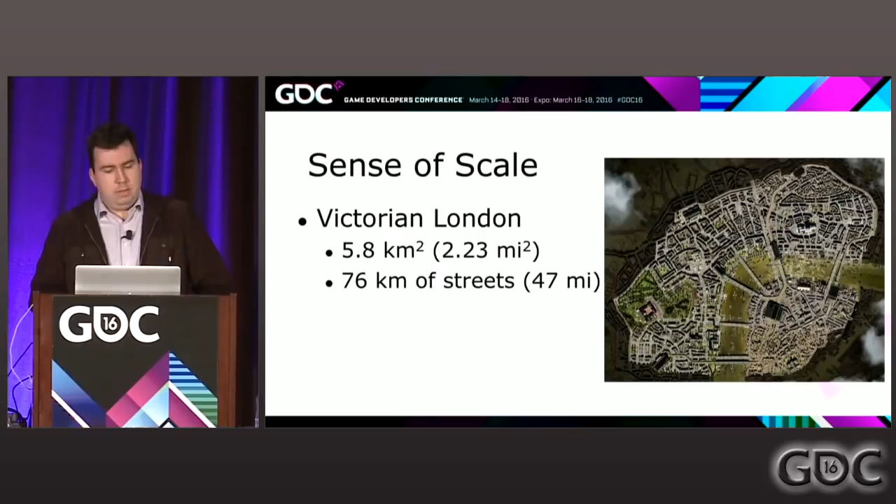So first of all, I will give you a general idea of the city we built and the kind of game we did for AC Syndicate. So it's set in Victorian London. We built a city of almost 6 square kilometers with almost 80 kilometers of drivable streets, a little bit more than 800 intersections, and we placed around 8,000 buildings. I'm speaking about generic buildings because it excludes the landmarks, train stations, factories, and kind of big buildings.

The sound is kind of weird, but you get the idea of the features. So in addition to the video, I'm going to talk about the user interface, how the user interface evolved throughout the project. For each subject, I'm going to introduce the context, explain what we did, and some information about the post-mortem and feedback we got on these features.

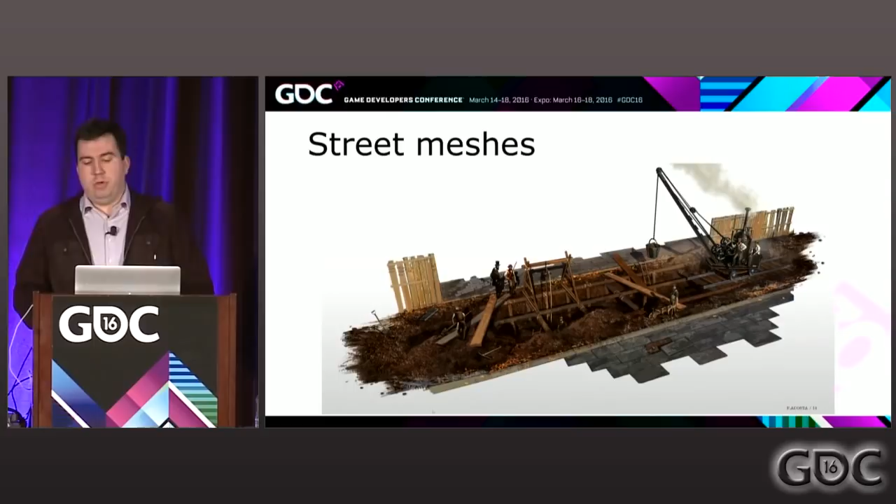We started by using a debug display to prototype all the features we wanted. Let me show you a quick video of the prototyping phase, without audio this time. At the beginning, you're going to see the creation of an intersection and our attempt to fit the AC Unity solution on the road network.

Not good. Okay. Oops, sorry. I'm trying to fix it. Okay, it should work now.

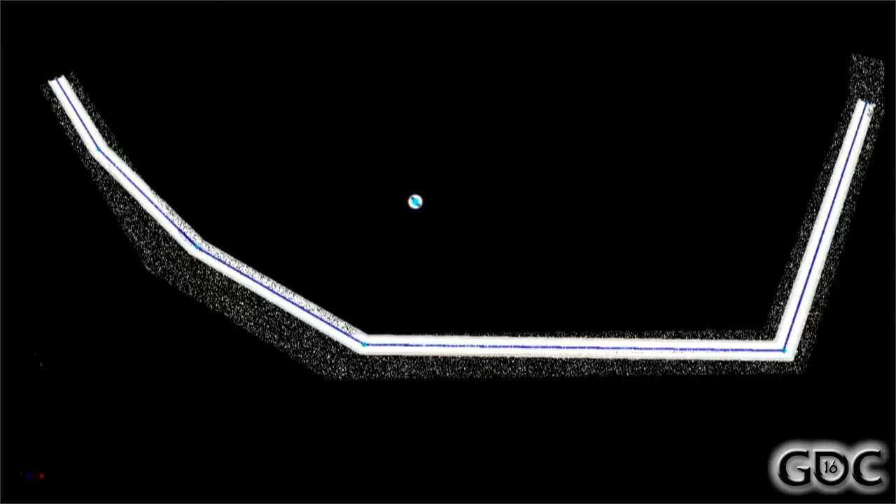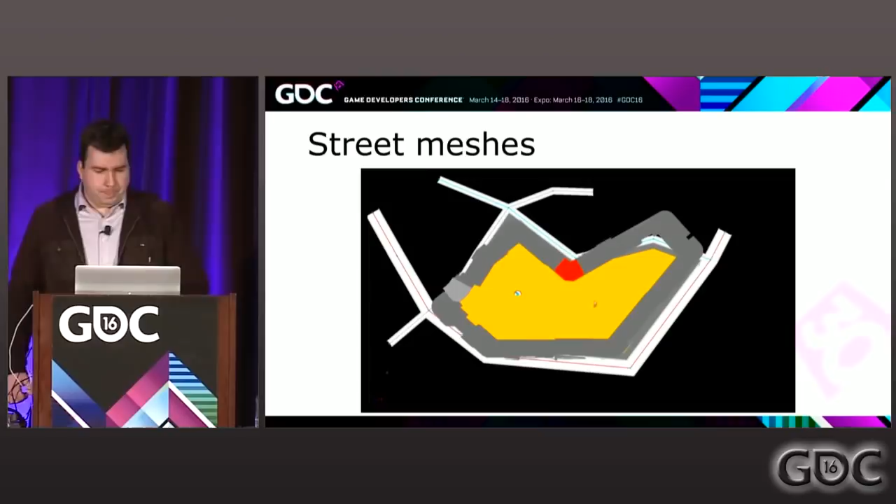Okay, so that's the debug display. Intersection, so remember it's only in debug display, so that's the network, that's the buildings. In the last frame of the video, we tried to fit the AC Unity Paris house blocks on the new street we just created. I highlighted the house blocks in blue.

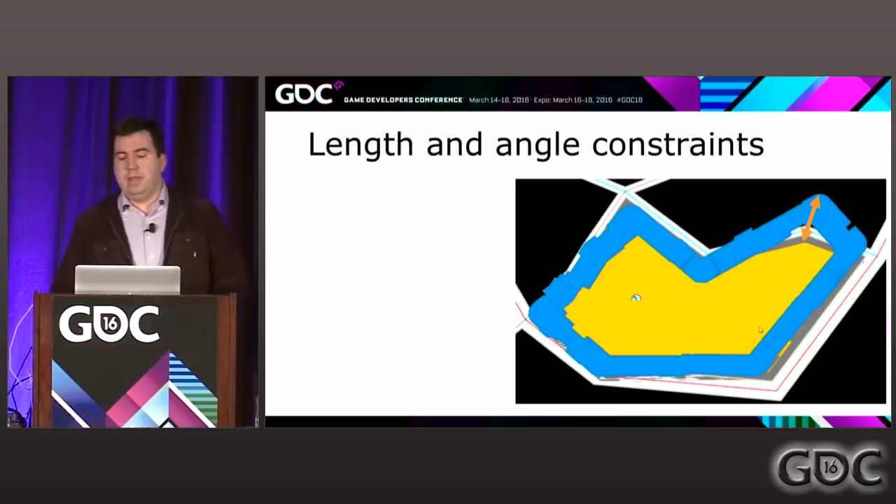And as you can see, the orange arrow shows a pretty wide offset between the building location and the edge of the street. This is due to the strong angle enforcement of the AC Unity technology. We could enforce the street to be at certain angles, but we realized pretty quickly that if we proceeded that way, any change in the city layout would alter much more than was intended. We would have a domino effect that would spread to the far reaches of the map. As you can imagine, this constraint was pretty drastic, and we needed to get rid of it. I will show you later how we managed to address this, but keep it in the back of your mind.

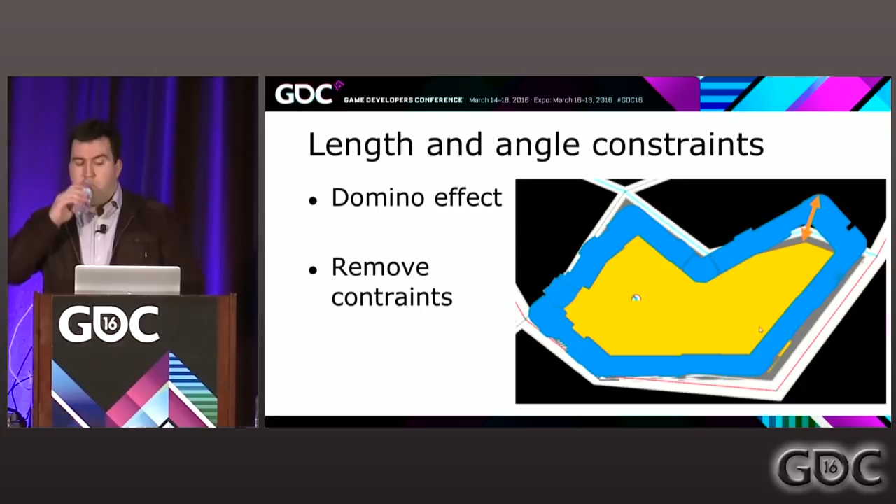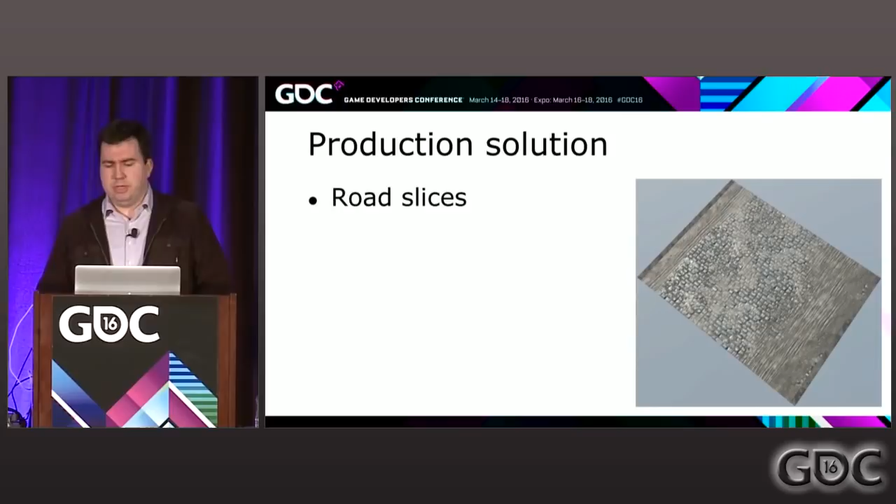The solution we settled for the road mesh generation is based on slices, small chunks of road of different sizes, carefully polished by artists. To generate the street of any length, we calculate the best combination of slices to approximate the length and stretch all the slices a little bit to achieve the desired length. During this process, we also handle slopes if one end of the street is higher than the other.

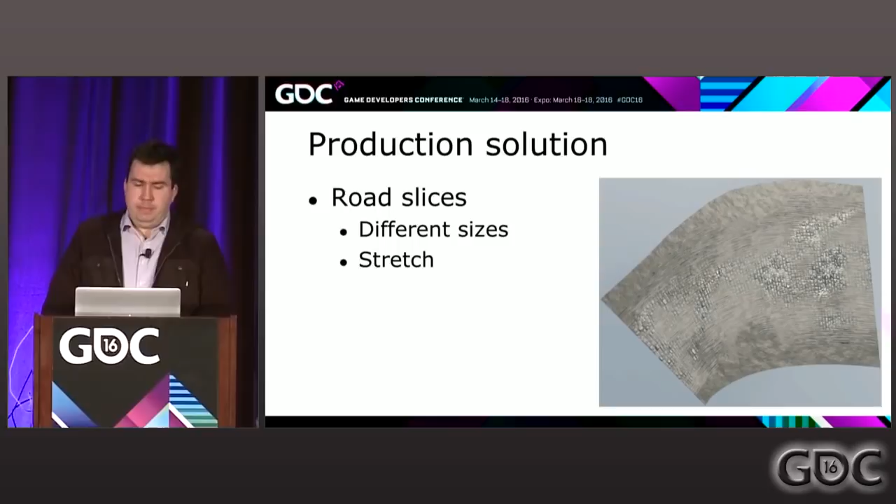For the intersection, we created unique slices for each type of intersection. To reduce the number of intersections, we were able to move the extremity of the street from plus or minus 15 degrees. So if we take a top view of the street, a very schematic one, it's a T-shaped intersection, and we could move the end of the street in the red cone. And it will be the same for all other street entries.

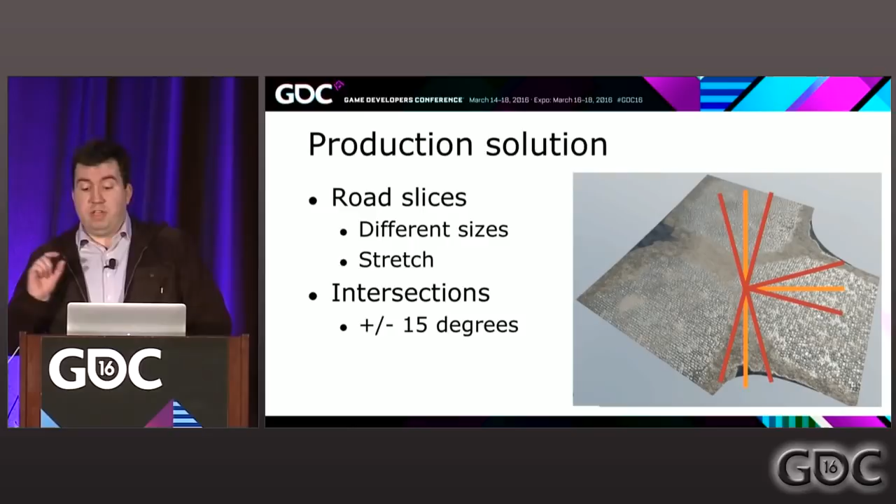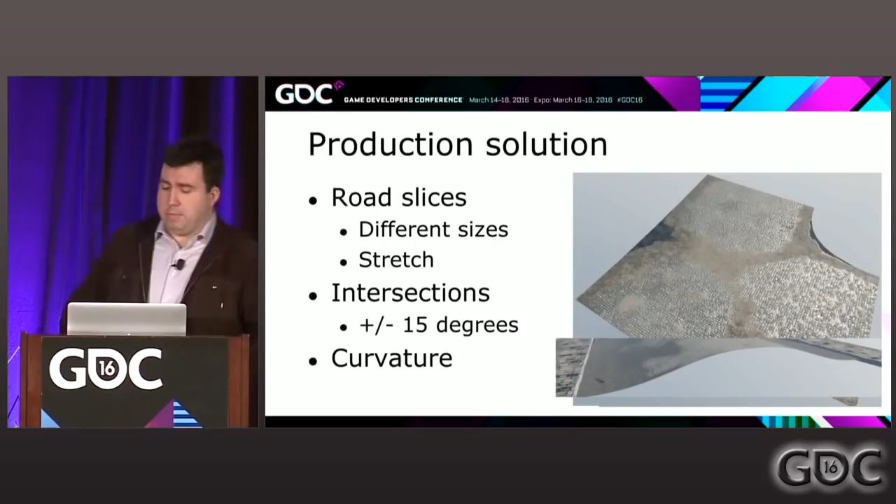At the end of the project, we added a curvature, a very small curvature in the center of the street. This picture is, oh, sorry. Oh, it's good. This picture is very exaggerated. The curvature is very big, but you get the idea.

To conclude on the street mesh generation, the final generated result was very satisfactory. In terms of graphical fidelity, the small stretching of meshes was not noticeable at all. However, we had made the street mesh generation very easy, and we did not do anything for the lot besides the street meshes. It was a major production issue. On one side, we made sure it was very easy to move the street around and to iterate fast on driving. But each time we moved a street, someone had to redo the ground around it.

The intersections were very tedious to create. Even with a small angle correction, so plus or minus 15 degrees, we had to create more than 100 intersections. And at the end, because everything was generated, it was very easy to add the curvature.

Then we tackled the next big challenge, creating the buildings placed along our road network. When building London, we had to account for some major iconic elements of the city. The first is, as you can see in this design document, the buildings do not always have the same depth. It's an iconic element, and you can create some interesting parkour situations at the back of the building, so we wanted to reproduce that in our version of London.

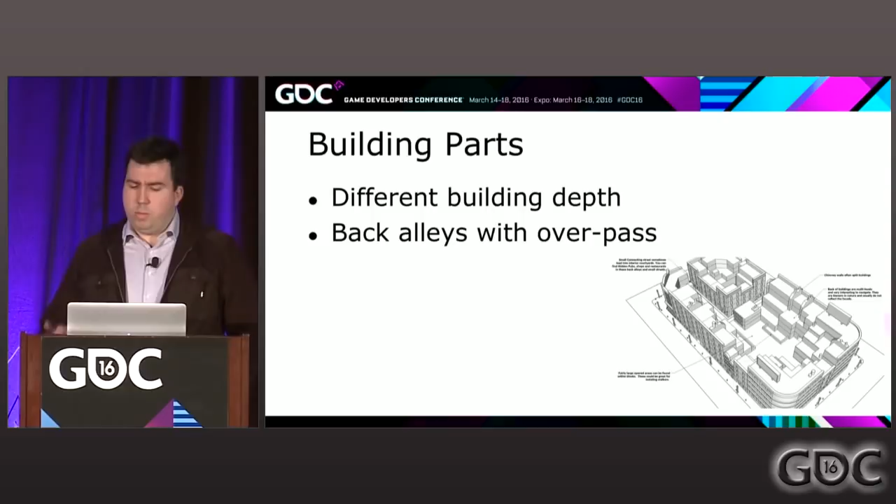In London, we have a lot of pedestrian back alleys which allow people to walk from the sidewalk to the courtyard, sometimes with overpasses. And another iconic element is the moat in front of some buildings. And we also tried to reuse the modular solution created by Unity.

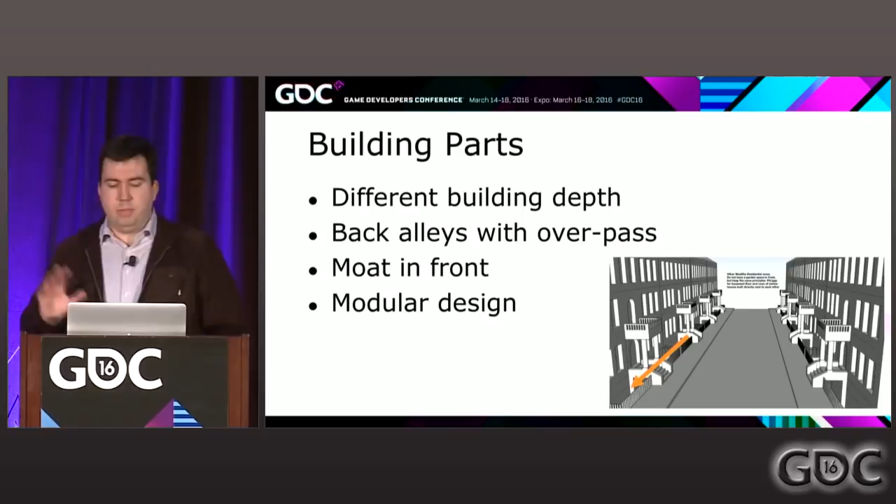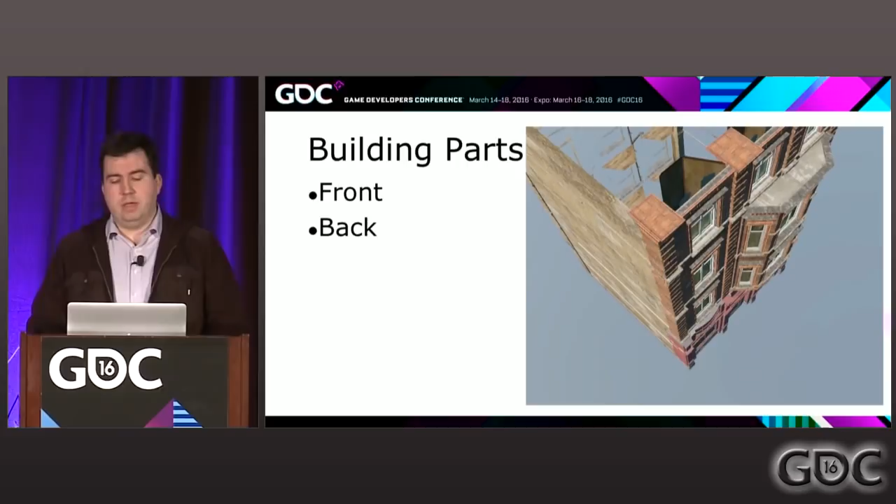Buildings are split in multiple parts, each being a key element of the building. The front, as you would expect, represents the facade of the building. In a similar fashion, the back represents everything behind the building. Contrary to Paris, we separated the front and the back to allow level designers to switch front and back independently, because you could have a very nice representation of the street side, but you want to change the parkour situation on the back by changing the type of stairs you have at the back. So you could change the front or the back independently.

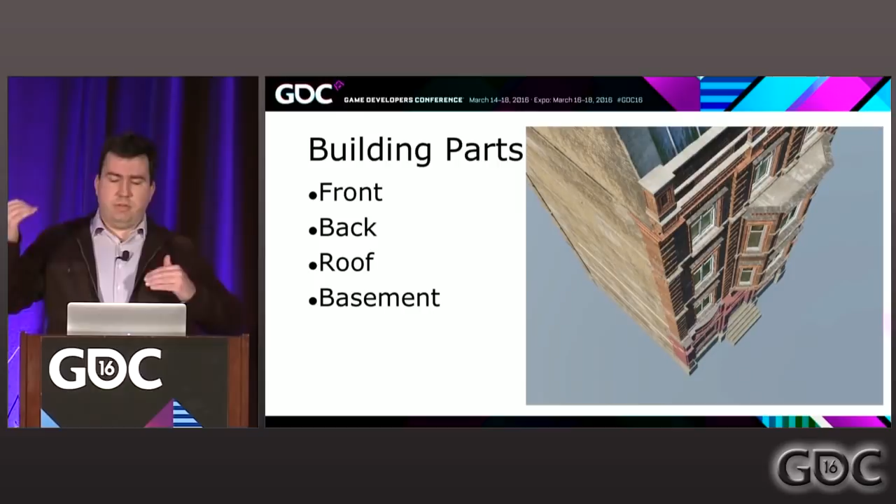The roof was the last indispensable part to complete the building. The basement, unfortunately not very visible here, could be added automatically if the building is on a slope, so if one side of the building is not at the same level as the other side. The garden could be added in front to increase the space between sidewalk and buildings. We also used this garden for the moat.

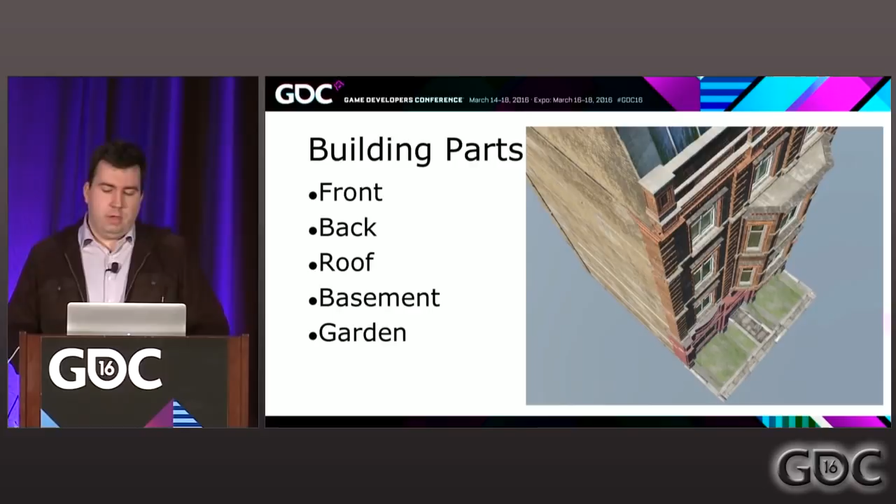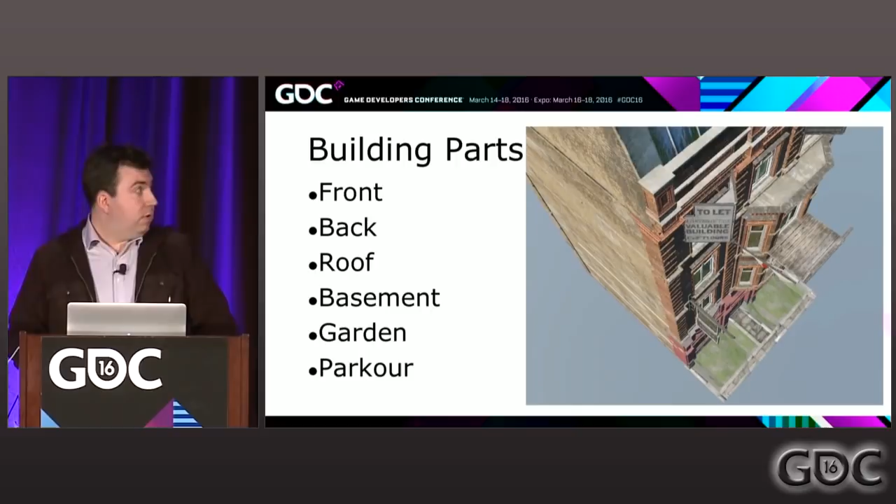And finally, the parkour part: since it would not be an Assassin's Creed game without traversal, we had a reusable preset props group used for parkour navigation and routes alongside the facade. Building parts are dependent on one another. This means that if we change one part, all the dependent parts will also change. For example, if you try to add an extra floor on the front, you will have to change the back to add this extra floor. This back could be a different depth, so you end up changing the roof, and so on and so forth.

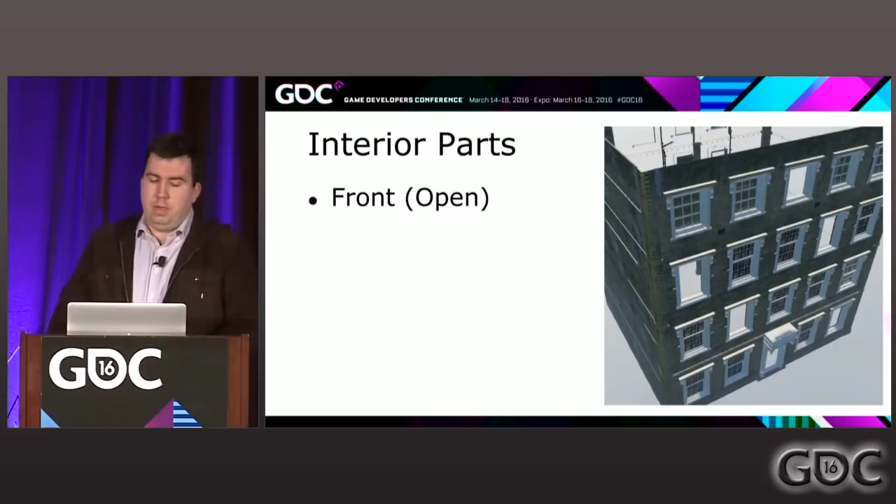In some cases, the building could be a pass-through building with open windows in the front and in the back. Contrary to the regular building, the front part also contains the back information, and you can see the holes in the windows and doors. We had no editable back to ensure that the building, the wall inside, will always fit. All the interior walls are in a separate part.

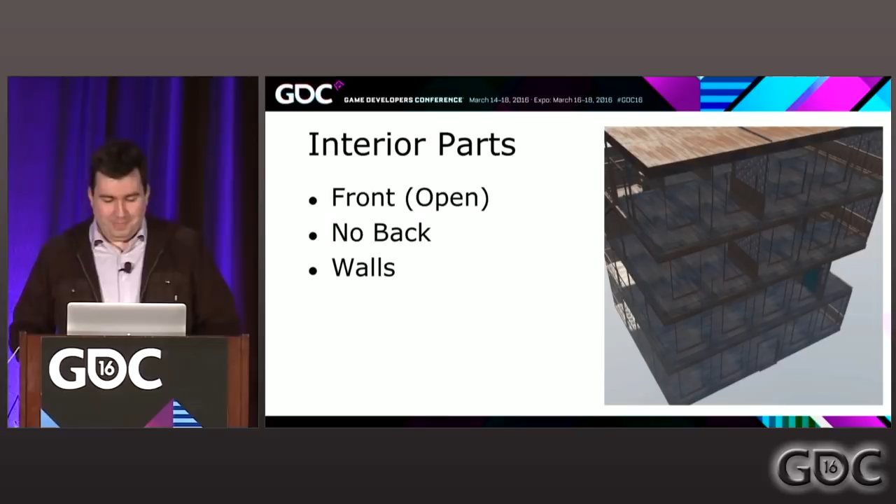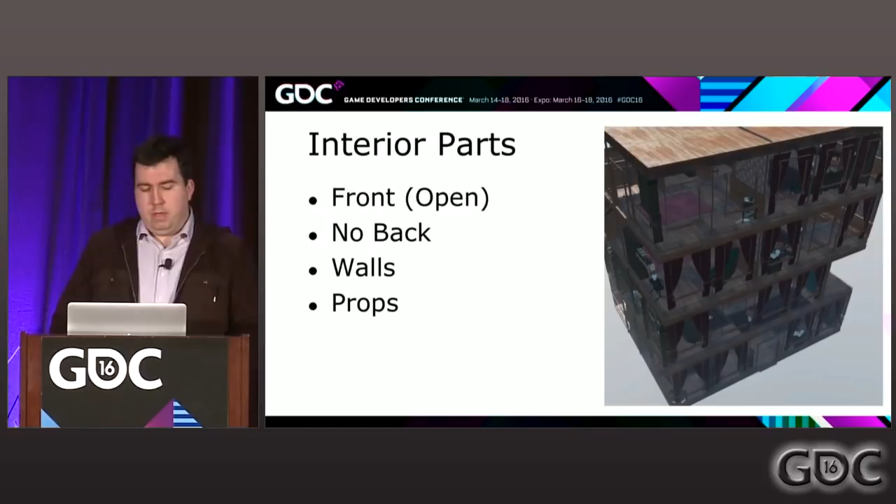I will remove the front to see the interior. A separate part, and that's the interior part. And the props are stored in a different part that allows, with a given interior wall part, to have different props variations. The props part also contains NPC placement inside the building. And the roof, similar as for regular buildings. And we, of course, also have all other parts: garden, basement, and parkour.

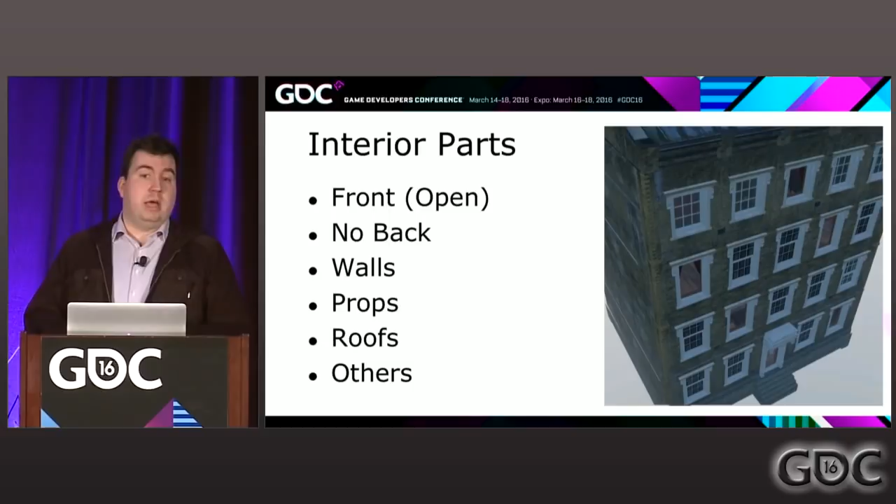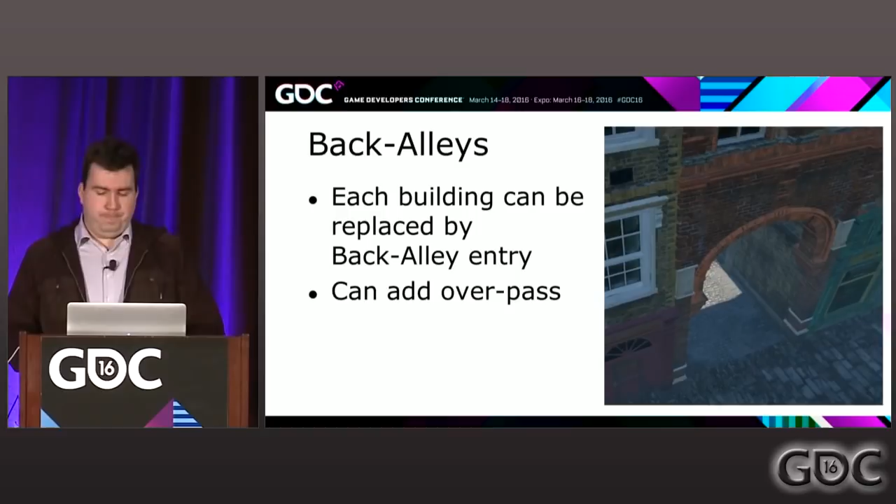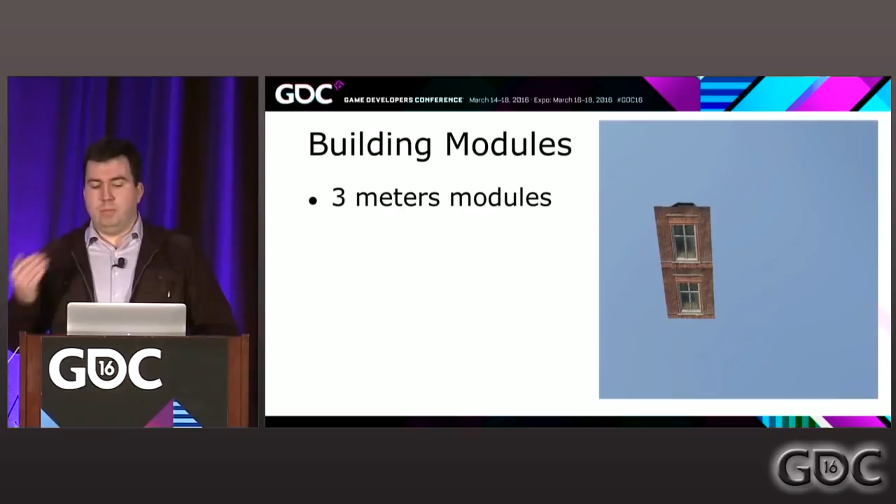The buildings are built using small modules. We have two main types of modules. The first are the 3-meter wide modules used for every important piece of the building: windows, doors, every feature. You can stack some modules one on top of the other to create different floors. The second main type of module are the columns, 0.5 meter wide. You can have as many columns as you want. With a little bit of imagination, the facade of the building is taking shape.

And for some specific features of the building, we had wider modules, always multiples of 3, in this case 6 meters. And street-level stores are built using the same solution, so 3-meter modules and columns, but with another design. And if you add decals and columns on each side, you have a pretty nice reusable building.

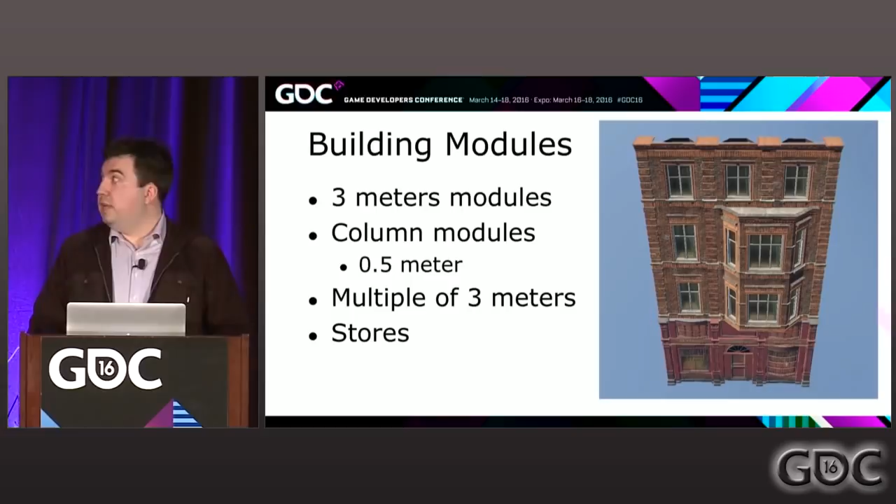With the combination of 3-meter modules and half-a-meter columns, here in top view, you can create your first 3-meter wide building. However, if you put the column on the other side of the wall, you can create a 4-meter wide building. And if you reapply the same solution using two 3-meter wide modules, you will get a 6 and 7.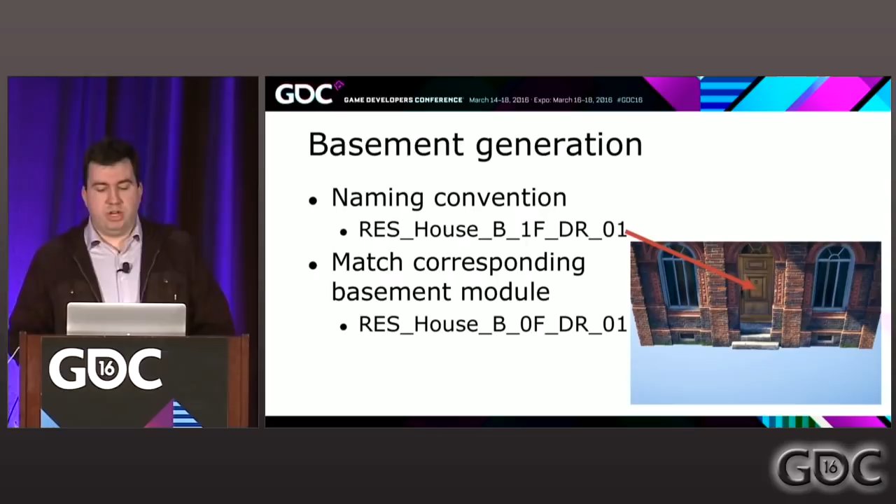By creating a basement part using a matching naming convention, we were able to generate all the basements around the city. You can see the naming convention is the same, only 1F is replaced by 0F.

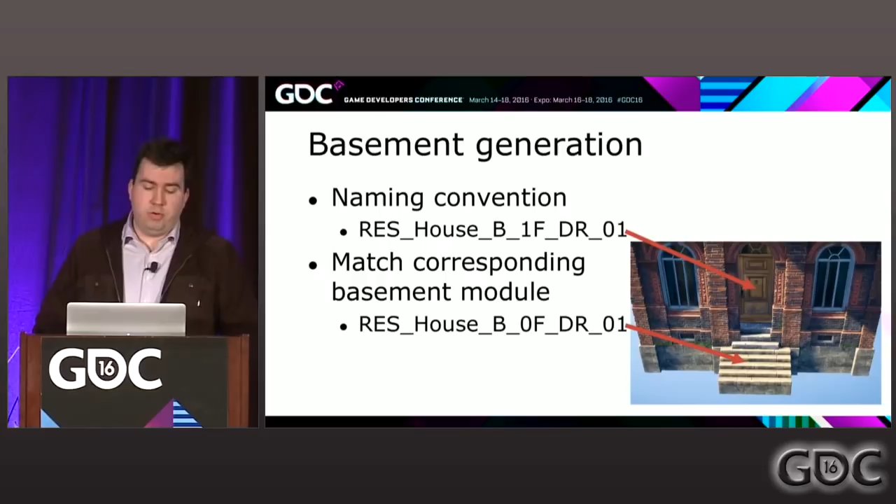In London, the fronts of the buildings are from diverse architectural styles, but the backs all share the Victorian style. Since that interesting fact was working to our advantage, it made sense to find a solution to share the back part throughout London and find a generation solution. So, for each back building, we created a polished single template. The template is then cloned and adapted to each architectural style.

In London, you have two types of Georgian back. You have the yellow one and the red one. Just by changing the color, just by changing the modules, using the naming convention to swap to other modules, we were able to generate backs for the other Georgian style, the red one.

And if we add a small item on the top, you can see we can increase the size of the building. This was used in the case of neoclassical buildings, which were a little bit taller than the Georgian ones. And we use the same generation process for the roofs, because they share only 4 different shapes throughout London.

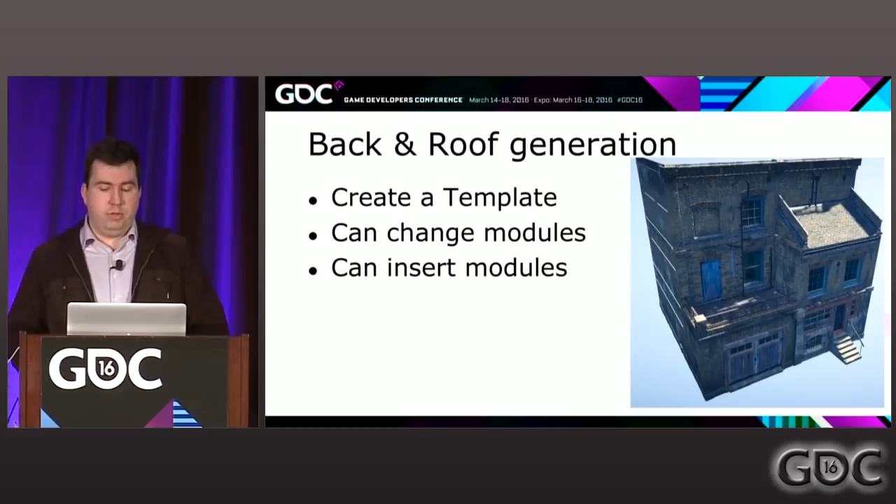To conclude on the building part, with this module solution, we could produce a lot of buildings for a lesser production cost. With all the part generation solution, we were able to save time and increase significantly the number of backs, roofs and basements we were able to create.

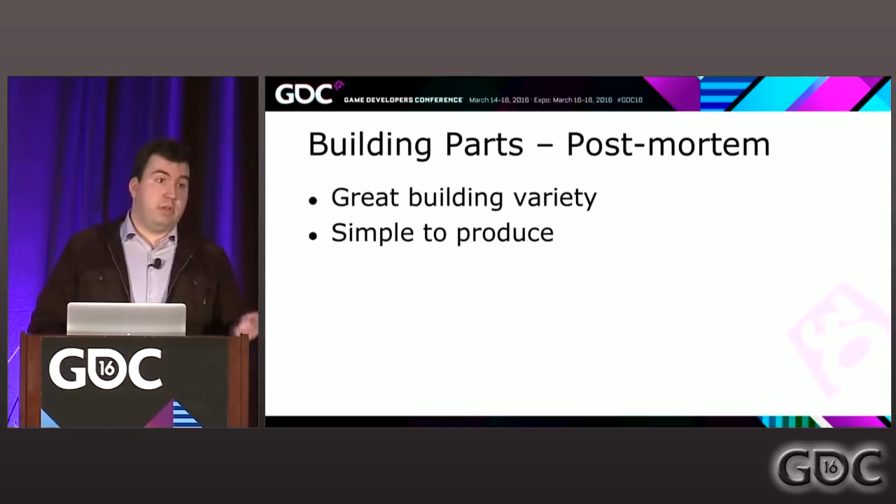Working with smaller modules, they are easy to replace, reproduce, copy, fix. It's a much easier way to work. And modules offer a great separation for taking advantage of hardware instancing.

Now that we know how the buildings are built, it's time to explain how they are placed along the street and how we are able to fit any length and any angle. London is split in 7 districts, each having its own artistic direction. To support this direction, we created 7 data banks, 1 data bank for each district, and each data bank contains 3 building styles.

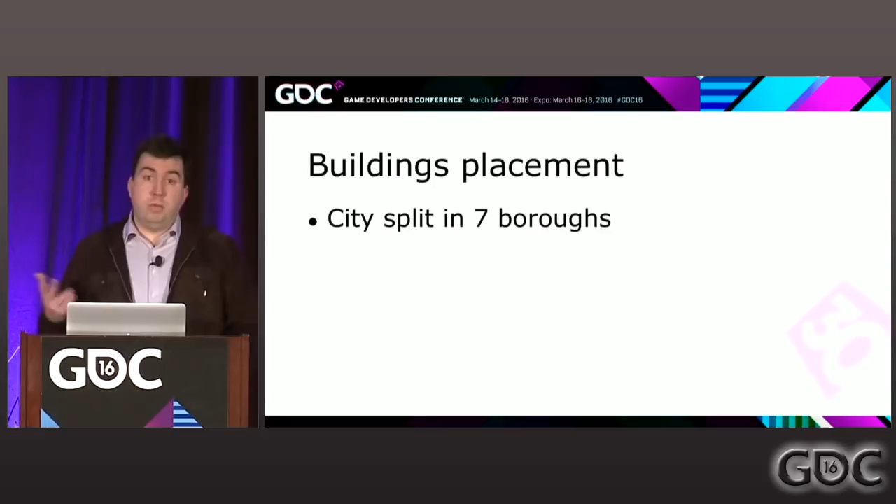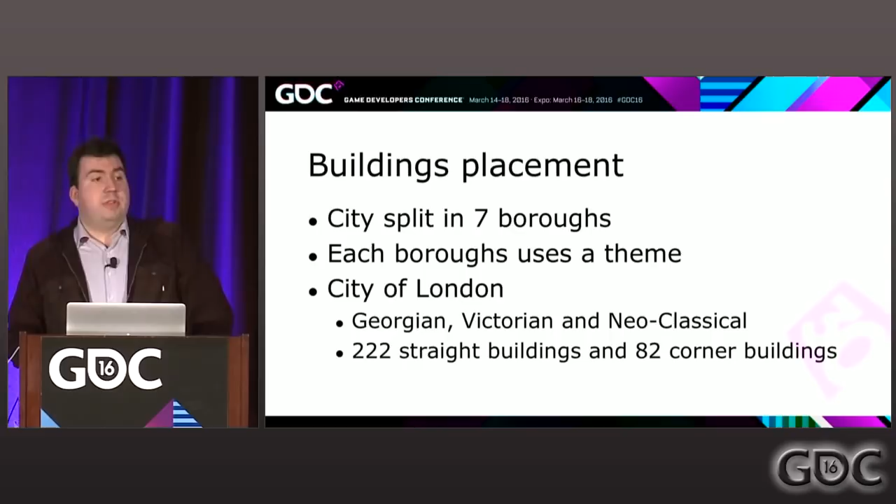For example, if we take City of London, the 3 styles we have inside, which we also call style kits, are the Victorian one, the Georgian one, and the neoclassical one. All districts are limited to only 3 building styles out of the 7 we have in the game for memory consumption purposes. The City of London district ended up containing a little bit more than 200 straight buildings and a little bit more than 80 corner buildings across these styles.

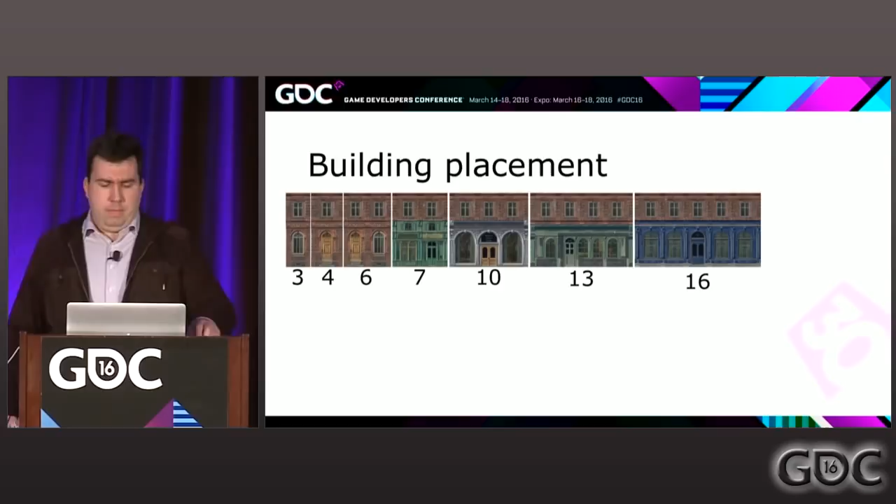Buildings are split in different sizes. Here we are going to explore the Victorian kit. We started by creating the straight building in different sizes: 3, 4, 6, 7, 10, 13, 16, and 5 different heights: 2, 3, 4, 5, and 6 floors. And we also created all the corners between 30 degrees to 270 in 10-degree increments.

A kit can hold more than one building for each type, but can also not hold a building for each type. So you can have multiple buildings. For example, the Victorian kit has three 7-meter wide, 2-floor height buildings, but had no 10-meter wide, 2-floor height building. So each kit can contain more or less buildings.

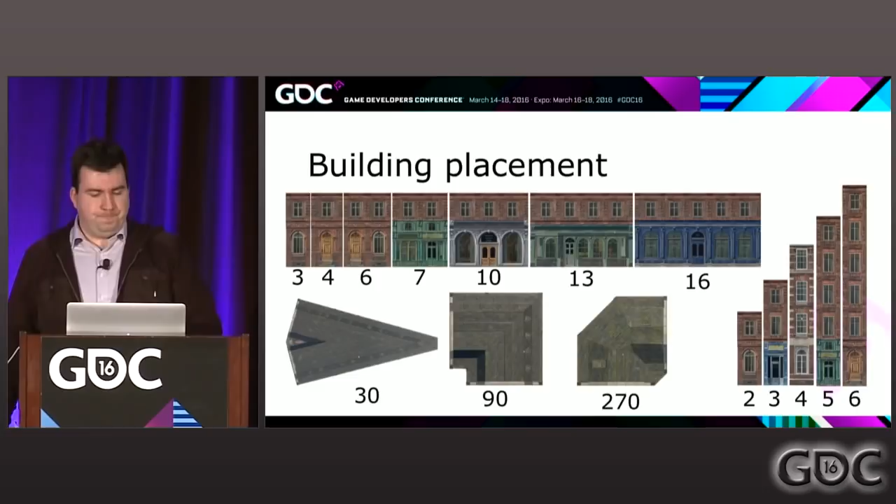Buildings are placed one next to the other. That means that given the available widths of buildings, so 3, 4, 6, 7, etc., we could only result in street lengths in integers, the same way it was in Paris. Since we needed to be able to create streets of any length, we introduced the concept of adjustable building, only one per frontage. I'm going to talk about it in the next slide. A frontage describes the group of buildings on one side of the street.

When the user resizes a street, we try to keep as many existing buildings as possible. So if we reduce the street by 3 or 4 meters, we are going to remove a 10-meter Victorian building and try to reinsert a 6-meter Victorian building to keep the street as consistent as possible.

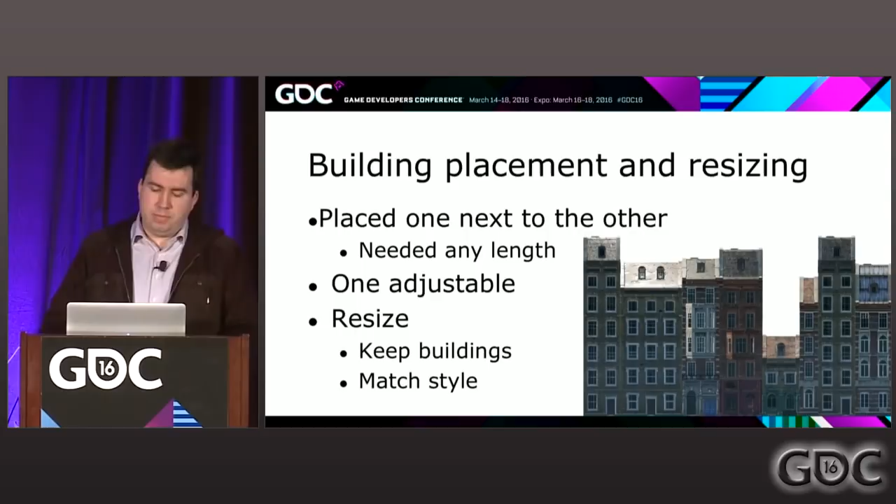Let's focus on the adjustable building. The adjustable building is capable of assuming any size between 3 and 4 meters. Let's check out a small video. Look at the building with the light green cylinder in front. Its size is going to shrink until it reaches 3 meters.

In fact, the building is split in 3 subgroups, one for each side, containing the columns and the wall perpendicular to the street, and a central group containing the rest. We slide the subgroups into the 3-meter center to reach all the sizes between 3 and 4.

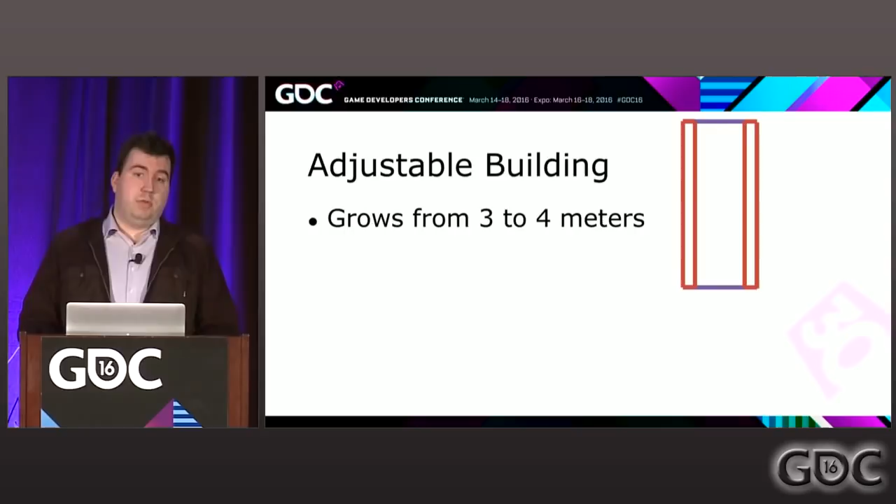So if we take a graphical representation of all the street lengths we could build, if we add the buildings we have at the beginning, so 3, 4, 6, 7, etc., we ended up with this kind of street we could create. If we add all the combinations of buildings, we can create almost everything over 9 meters. And if we add one adjustable building in each frontage, we were able to create everything between 3 and 4 meters, everything between 6 and 8, and everything over 9 meters.

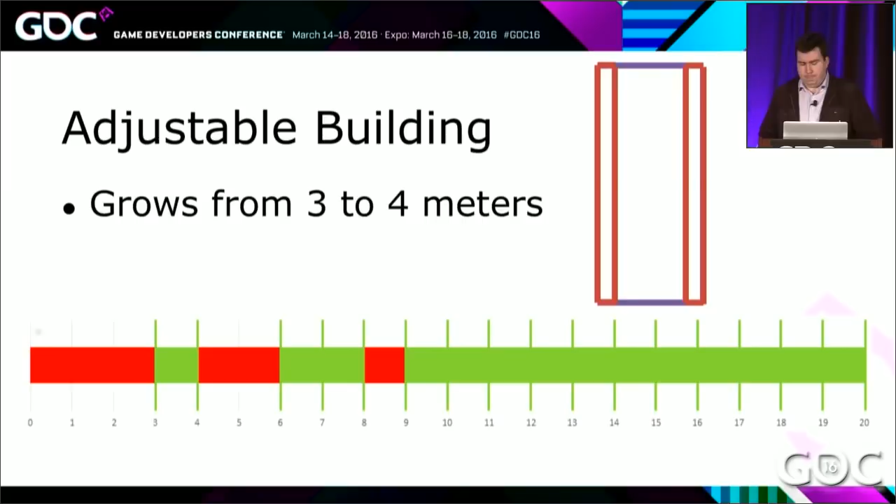In order to have streets at any angle, we had to have corner buildings capable of matching any angle. The general concept for adjusting a building to an angle is to rotate the walls around 6 pivot points. Here you can see a 90-degree building in top view, and the 6 pivot points are located here. We use only rotation on the building, no scaling, in order to avoid creating unique geometry for each corner.

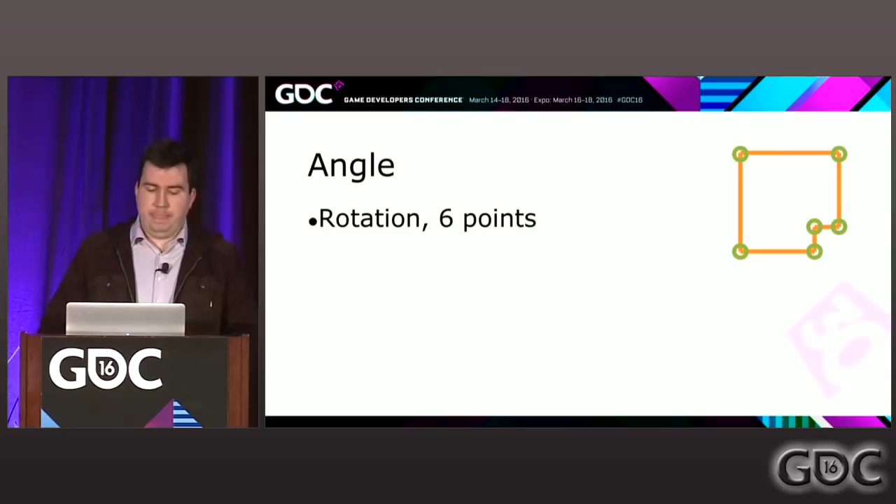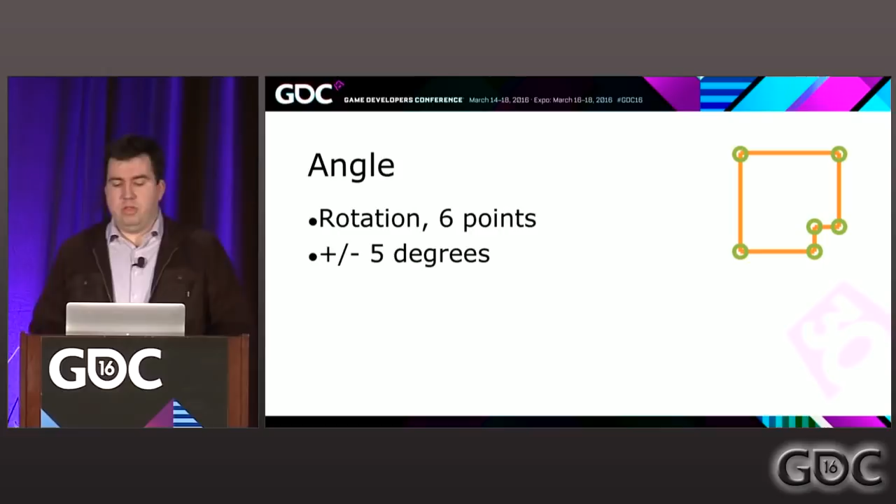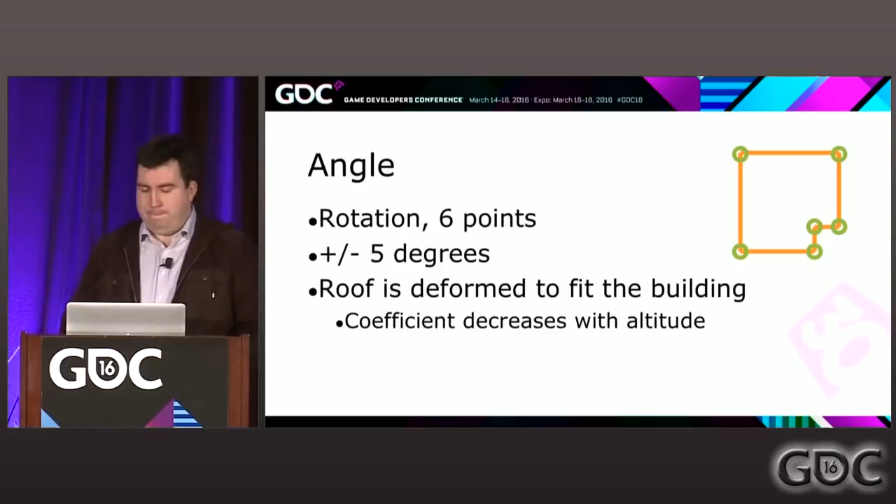Since we had already created buildings for each corner in 10-degree increments, we needed only a rotation of plus or minus 5 degrees. We thought that such a minor deformation would not be noticeable. Only the roof needed to have unique geometry. The geometry is generated by deforming a template, and the coefficient decreases with altitude in order to keep the roof ridge. So let's check out the result of the deformation together.

Here is a screenshot of the back of a 90-degree building. At first, a 1-degree deformation. Remember the top view from the previous slide. The 1 degree is between this wall and this wall. Let's continue our journey. 2 degrees, 3, 4, 5.

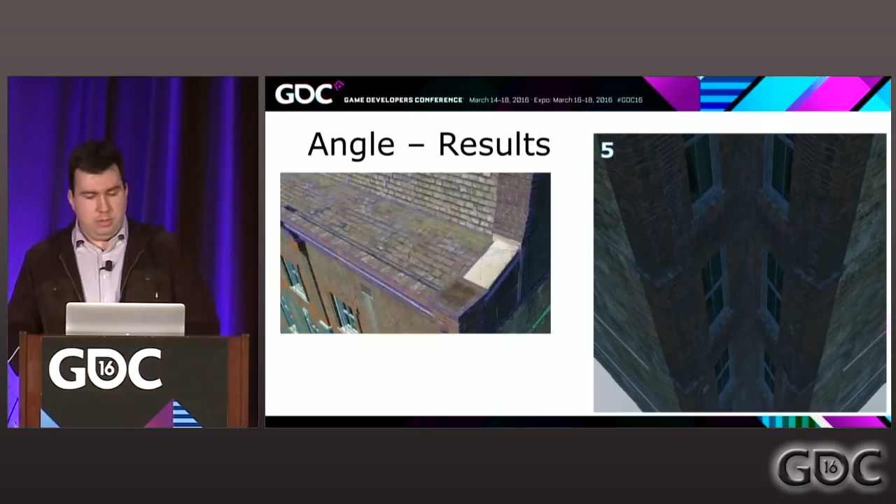At this point, it's pretty clear we cannot use this solution in a triple-A game. The result makes no sense. Nobody will build a building with windows that close to each other. And if you look at the other part, the roof in front doesn't look that bad with a 5-degree deformation, but the back is pretty much destroyed. And even the columns are stretched too much. So we had to find another solution.

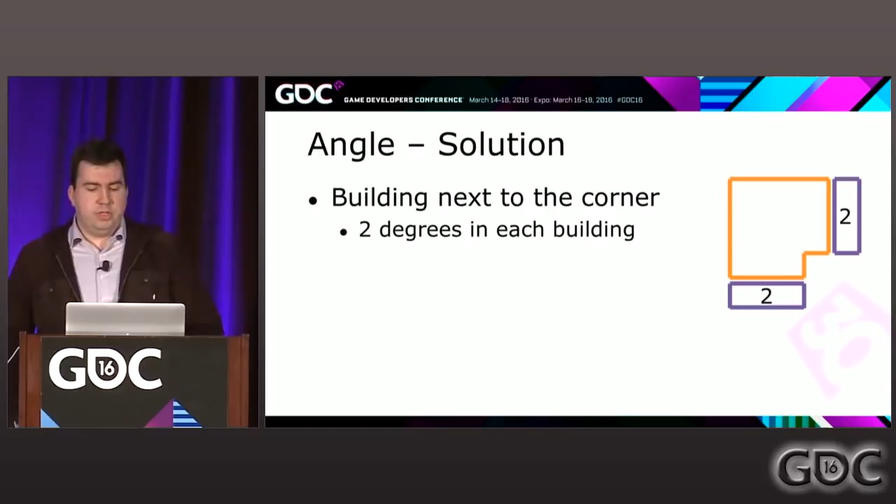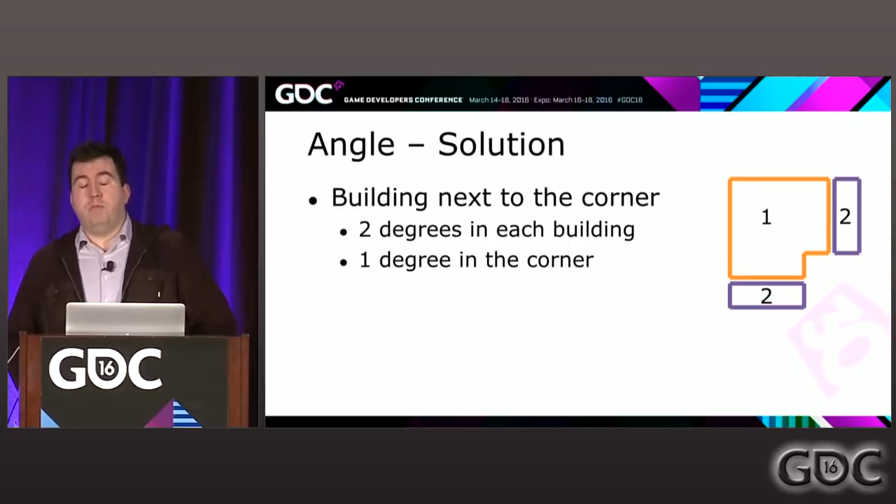We concluded that it was not possible to have an adjustment of plus or minus 5 degrees on the corner building alone. So we decided to split the load in 3 buildings: the corner and the 2 buildings adjacent to the corner. 2 degrees on each building adjacent to the corner and 1 on the corner itself. The corner building is the last to be altered in order to avoid generating roof geometry as much as possible.

If we look at a building next to the corner, it is split in 3 parts, like the adjustable building, and instead of just sliding the wall inside and out, we just rotate the wall next to the corner, and it's going to adjust to the angle correctly.

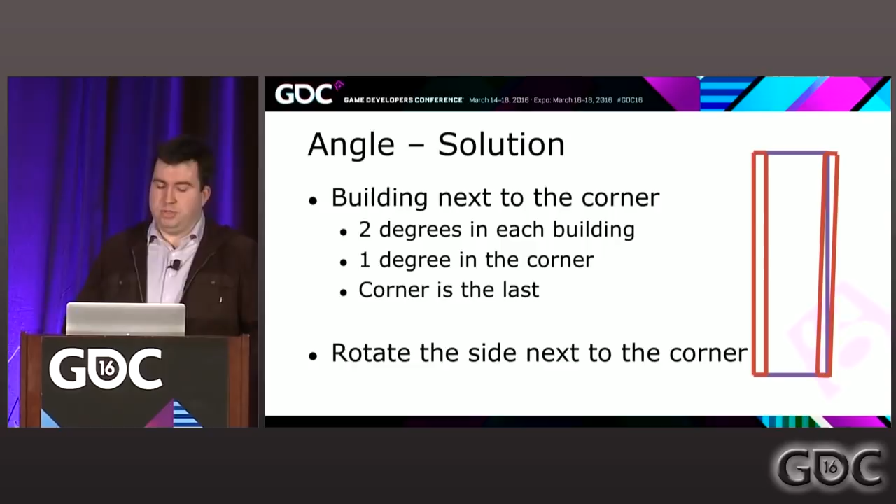To conclude on the building placement, I'm going to bring back the diagram from 4 slides ago. With the introduction of the angle solution, we had a new limitation. We needed a minimum of 3 buildings along a street, 1 next to each corner to account for the angle deformation, and 1 in the center to account for the fractional part of the street length. So everything under 9 meters was not possible anymore.

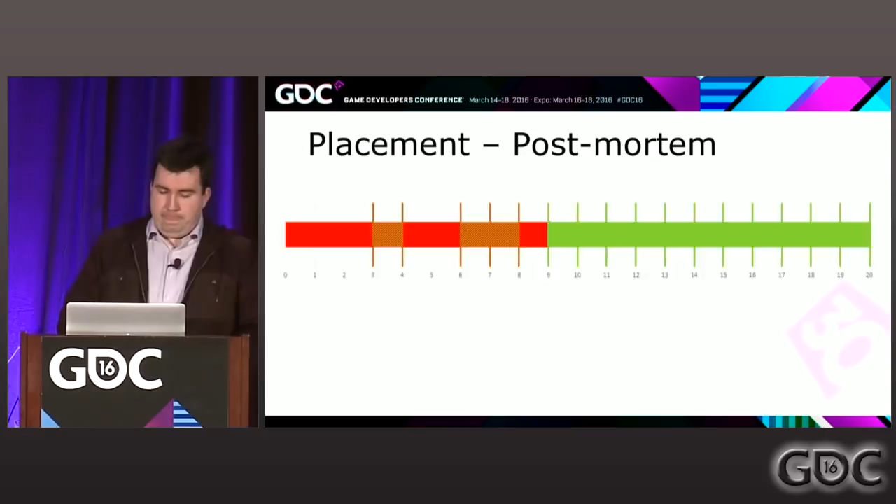To sum up, it looked weird to always have 3 meter buildings next to corners. So we ended up having to create adjustable buildings, not only for the 3 meters like we originally intended, but also for 4, 6, 7, 10, 13. I think we don't create any 16. And these buildings are 30% more expensive to create because you have subgroups to manage and that kind of stuff.

Because 9 meters is now the minimum street length we can create, we had to produce smaller corner buildings in order to try to crop some size off the corner. So we ended up creating more smaller corners.

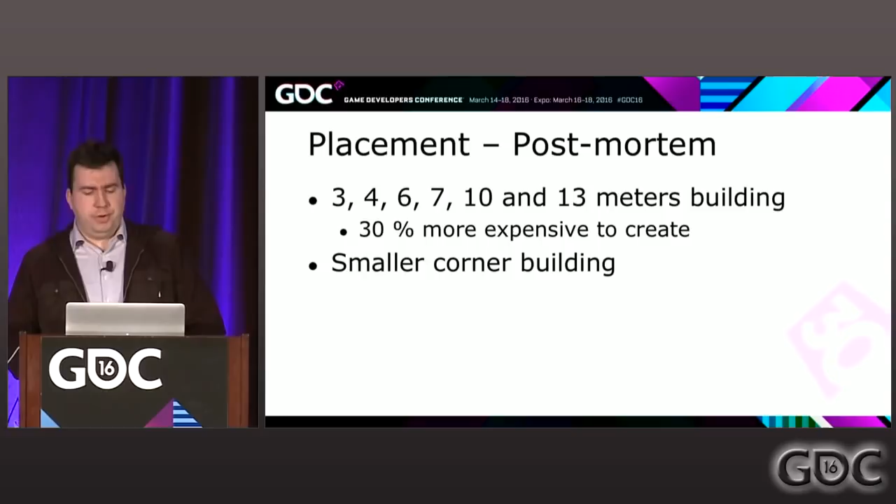And at this point, you are probably asking yourself, was it worth it, all this work? Placing buildings next to the street was definitely worth it for our project. We had early playable buildings. We could drive very early in production, and the city was ready sooner than in any other Assassin's Creed game before. But definitely, there is a lot of room for improvement.

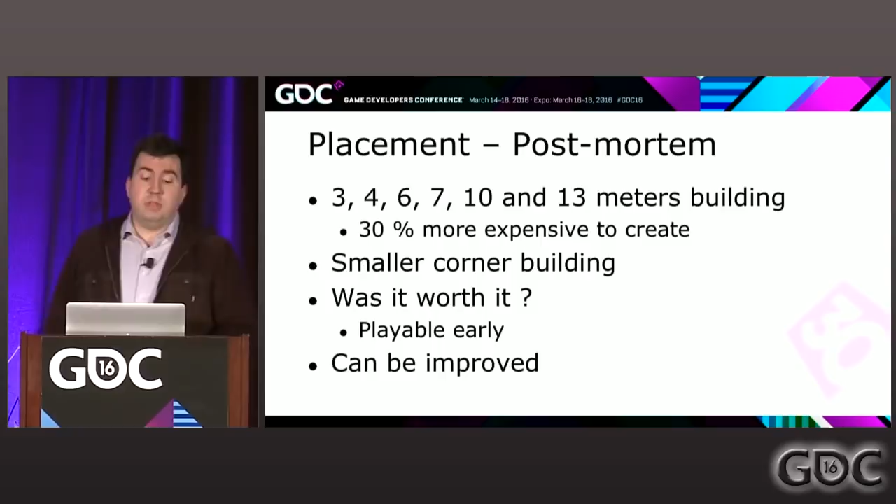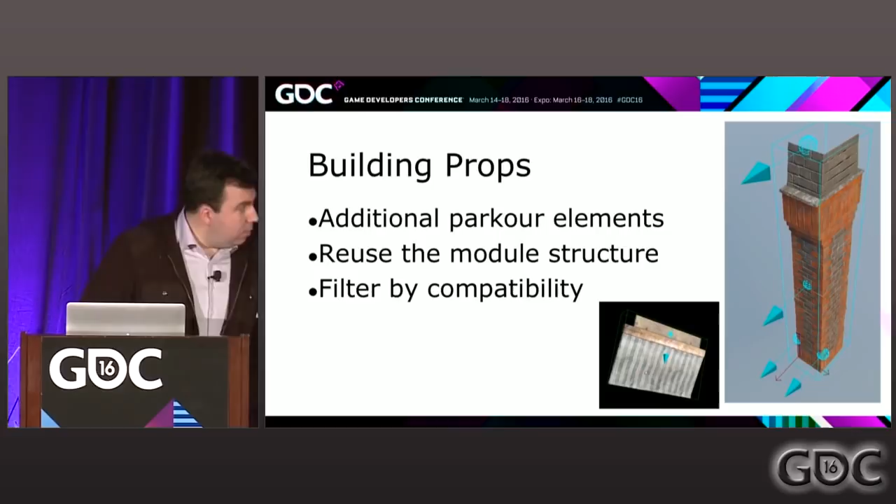In addition to the magnets on the building, we added magnets on the props. We very early discovered that we had to filter everything, because when we added magnets on awnings and we didn't filter them, we didn't have awnings only on top of stores, we had awnings everywhere. So filtering is key.

The first implementation of the magnet solution was for the user to select an item and try to drag it along the wall until it snaps somewhere. It was very similar to the solution we used for the bridges, but we quickly realized that it was not a good solution. We had too many magnets, one close to another, and the placement was very tedious.

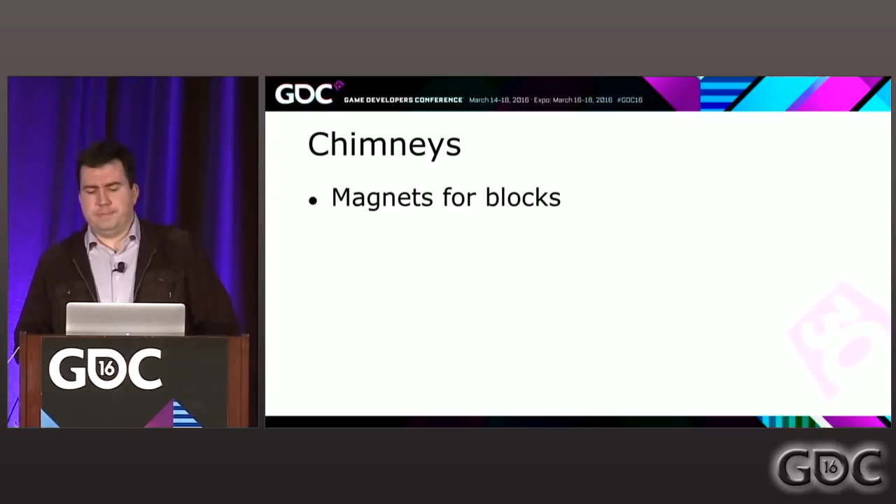We switched to display all the available slots on the wall, and just by selecting one, a list of all the compatible props will be displayed, and you could choose whatever you want and move to the next. The list is always curated depending on the flags on the props and the item you want to place. For the chimney, we use the same magnet solution with specific tags, of course. And as you can see, we had some chimney variation.

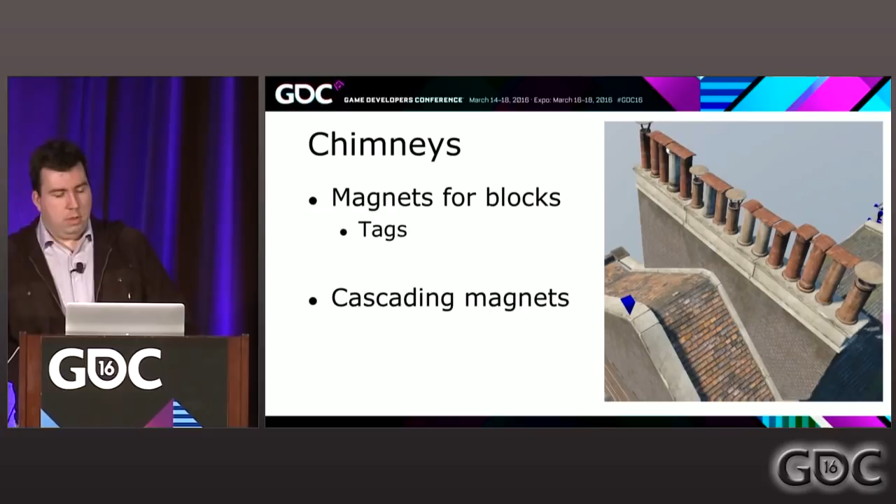We originally intended to have cascading magnets for chimneys, one for snapping the chimney wall on top of the roof, and on this wall we would have other magnets to snap the chimney exhaust on top of the wall. But after using the magnet, we realized it was sufficient to have only one snap magnet for the chimneys. So we didn't do cascading magnets, but it would have been fun.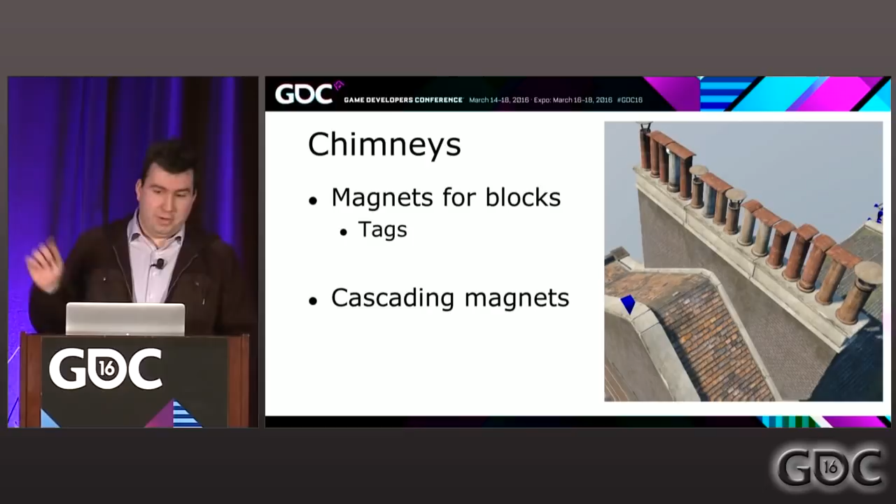The crowd life is a big part of the Assassin's Creed experience. They create the living, breathing world feeling throughout the city. Crowd life is made up of stations, like a guy reading his newspaper, two people talking about the weather, placed throughout the city.

In order to ensure proper station placement, we created slots for crowd stations at ground level. The usage was very similar to a prop magnet. The street creation tool automatically generated a first pass of crowd life when the buildings are built. The idea is the same: you have slots, they're much bigger because crowd life is much bigger, but it's the same idea.

The main feedback we received on the building props is that it was available too late in production. The post-mortem revealed it was a very efficient way to add items on walls and roofs. It encouraged diversity since all the available props are clearly displayed. On previous Assassin's Creed games, because of the difficulty to find props, level designers tended to reuse what they knew instead, even if more props were produced.

Crowd life slots ended up not being used that much, not because of the implementation, but because of the restriction imposed by the size of the sidewalk. We did not have enough space on sidewalks to add a lot of crowd life. Many stations ended up in locations not covered by the road network, like parks, back alleys, and this kind of stuff.

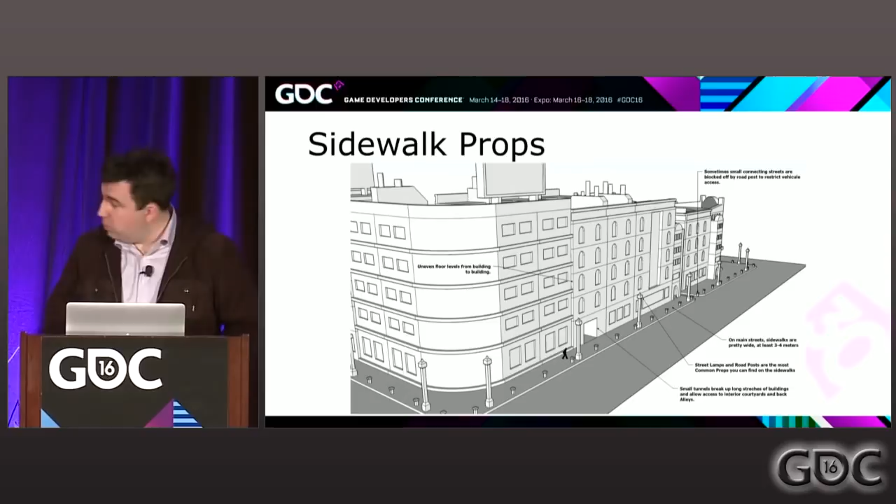As you can see in this design document, street lamps and road posts were part of the game early on, and it was one of the last features we implemented in the road network pipeline.

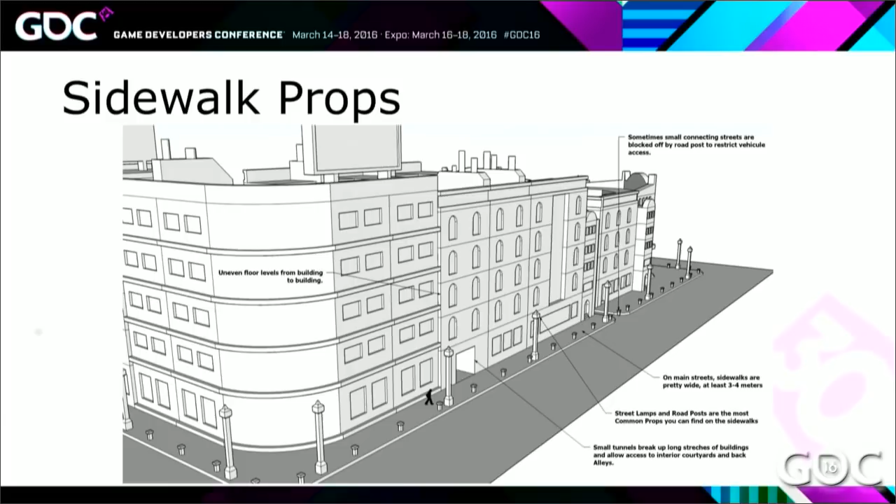Sidewalk props are generated based on rules. Rules are defined once and used multiple times throughout the city. Rules have very simple parameters. If we start from an empty street, we could use a rule to add bollards next to the street. Every prop will be placed directly on the sidewalk.

We also could alternate between two props. In this case, I added some lampposts. The ratio doesn't need to be 1:1—we could have two bollards between each lamppost. But as you can see here, or rather as your artistic director is going to tell you, finishing a street with a bollard is not very pretty.

So we quickly realized that strictly enforcing the space between props is not very important. What's more important is that starting and finishing with one specific prop. So we ended up having kind of auto-scaling rules that try to have a lamppost at the start and the end; the lamppost is defined by the rule. The rule could also be placed next to the building or in the center of the street, and of course you can adjust density and the endpoint of each side.

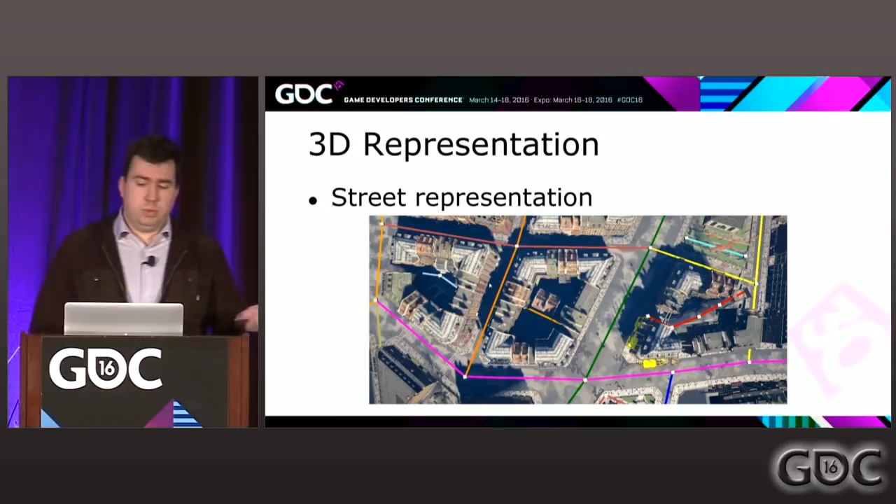Here is a picture. In this picture, we can easily recognize the street. A street is a group of edges that share the same color and configuration, like pavement style and width. Each street can be named, and level designers choose to use the real name of the street in London.

If we zoom a little bit further, just after creating a new street, there are no buildings placed on the frontage, but the representation is already present. If you select the frontage, it's highlighted in yellow, and then an orange and yellow sphere appear.

These spheres are used to offset the building construction along the frontage. Using the offset, we could expand or restrict building placement alongside the frontage. It was very useful in case we didn't have any corner building or we wanted to fill empty space with a straight building. We chose two colors instead of left and right offset because it was less confusing.

When buildings are generated, the frontage is split into lots. Each lot holds only one building, with an alternation between green and dark green. The only light green lot represents the adjustable building I mentioned previously. Please look at the first lot.

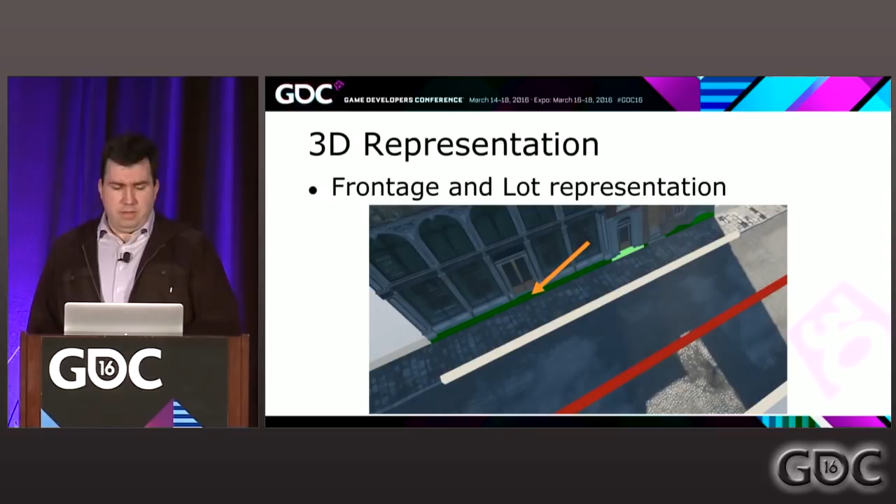When the user selects a lot, he was able to do very simple operations like splitting or merging some lots. In this case, I'm going to split this lot into 3 smaller lots. It was just an action, pressing one key on the keyboard. And of course, you can convert into back-alleys, convert into open building. You can do every operation just by selecting one lot, and once more, the selection is highlighted in yellow.

The props, or the prop rules, are displayed on the frontage too. They have their own representation. Each slot has a small representation, and you can select it to remove it, in case it's in front of a back alley entry, for example.

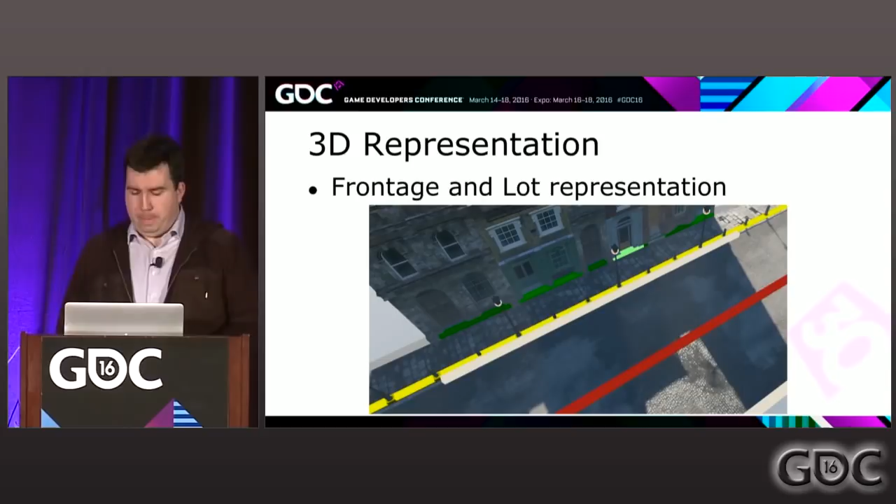Since the whole goal of this project was to have traffic roaming throughout the beautiful city, we had to find a way to represent and edit its flow. We chose to use the common representation of crosswalk and arrow, even if the historian was pretty scared by that, because it was not used during the Victorian era, but it was very easy to grasp for the level designer.

The crosswalk will be moved along the edge from its original position, so you could move the location where the people are going to cross the street. And to avoid any traffic jam, we could configure every lane in only one or multiple directions.

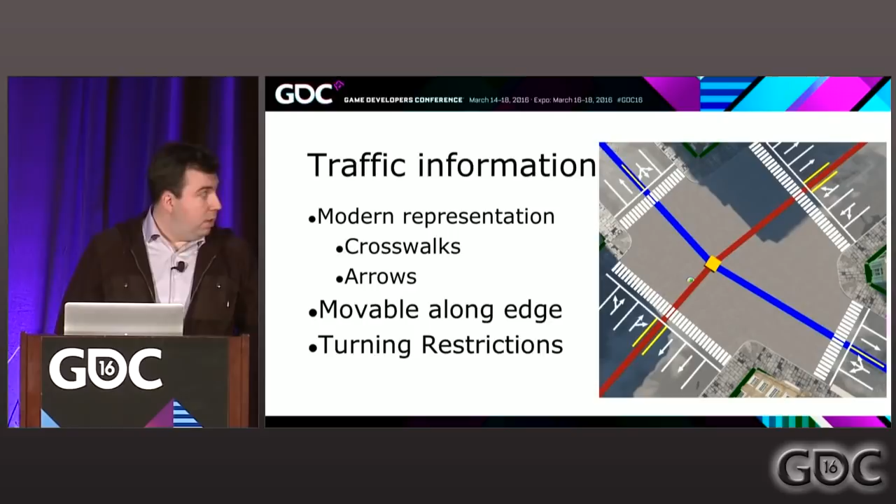For changing building parts, we started from what was developed on AC Unity. We used the cycling word to describe the action of changing buildings from one part to another. The process on Unity was very simple: you use your mouse to click the part you wanted to change, the roof or the body for example, and you press up and down on your keyboard to change between the variations. It's called cycling for this reason.

To improve on that, we decided to focus on the lot instead of building parts, by allowing all the parts to be changed by only selecting one lot. When a lot was selected, we had a cycler appearing on the top left of the screen for the type of part you want to cycle, and a cycler for the value on the top right side of the screen, to cycle between all the values.

So this time the level designer could know what part is coming next. And each cycling wheel clearly contains a key you have to press, and you no longer need to use your mouse to change between parts.

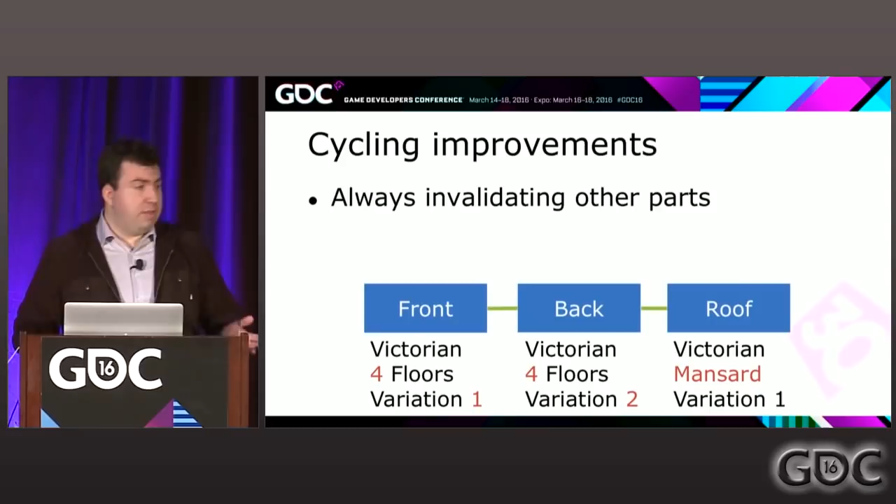In order to address this problem, we introduced a new cycling mode, not directly related to a specific part but more to a concept, the concept of style. It allowed the user to change the style without having to cycle through every part. So it just changes the style once, and the front, the back, and the roof are going to change. We also applied the same concept to the floor height.

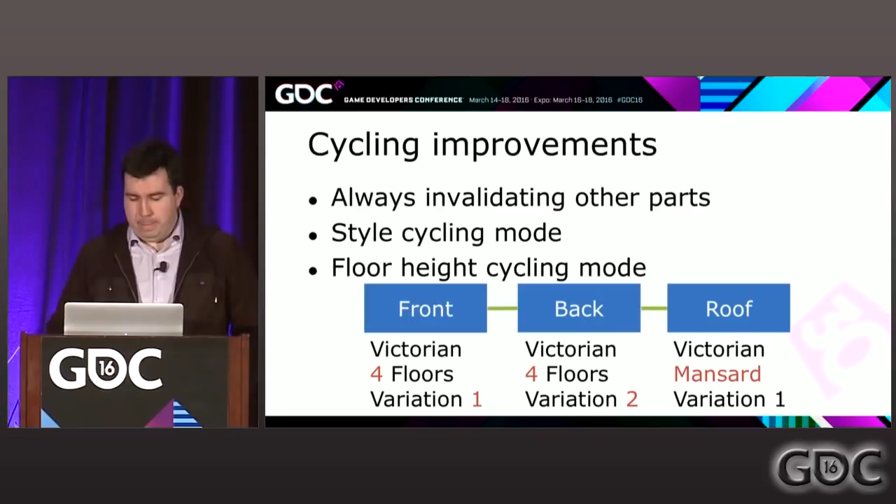But at this point, we realized that cycling was not the proper solution we needed. We needed to be able to go from one point in the list to another without having to pass through every building, every item in the way, and needlessly altering stuff along the way.

The Caddy is the solution we finally settled on. It was a floating panel that appeared on the right whatever you select in the 3D representation. The Caddy always contains a custom-made UI for the situation. Here are some examples.

The first is the street configuration. Because we only had a limited number of street width, we had to provide a simple way to edit. The total width is calculated depending on the parameter provided by the level designer.

The second is the crowd life station. The third is the Caddy for lots in basement configuration. The top part is for general configuration: the type, the style, the number of floors you are going to have. The bottom is for basement configuration specifically.

The fourth is for building props. Here we use the thumbnail view. It encourages variety by presenting all the props in a simple and understandable way.

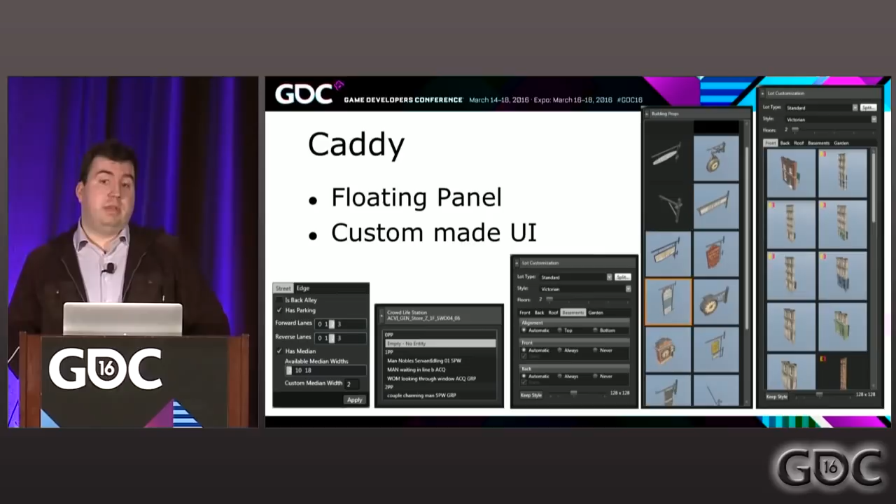And the last, similar to the third, but this time in front configuration. The top is the same, you have style, so on and so forth. But the bottom displays all the thumbnails for the building part, to allow the user to move quickly from one to another. And once more, it had the interesting side effect of encouraging diversity, because everything was clearly displayed.

The first thing we learned is that in order to have a rich 3D view, we absolutely need performant 3D debug display. We ended up having to do a lot of optimization in 3D debug display, rendering, and picking. I cannot emphasize enough how important it is. Being able to render in 3D opens a new field in UX possibilities.

Anvil has probably, the majority of the game editor I would say, is very property grid based. But the Caddy, with its custom UI tailored to every specific job, was the most praised feature of the postmortem. Users were asking for this kind of edition in other parts of Anvil.

So, takeaways. Road generation is not enough. If you create a similar system, consider generating the entire ground, not only the street. It resulted in a lot of time spent in back and forth between artists who build the ground and level designers who move the street around. So consider generating everything.

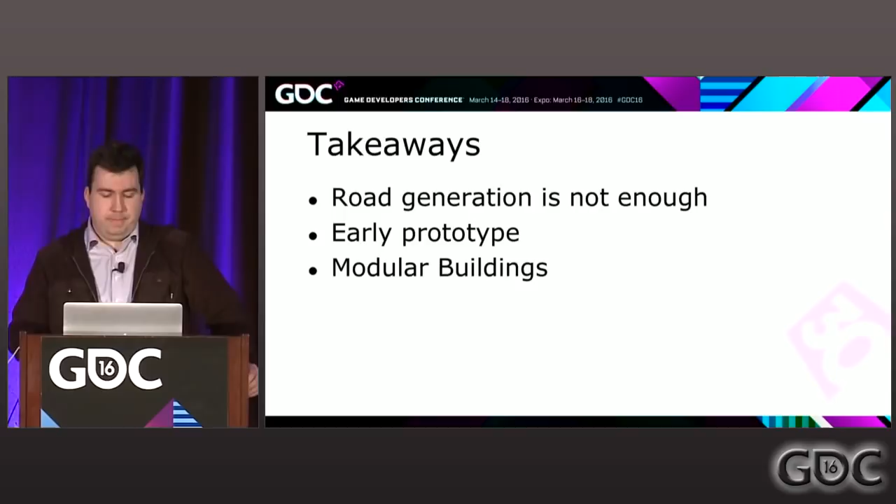And last, custom UI are the way to go. The postmortem revealed that custom UI that suits the needs of each class of users, level designer, level artist, audio designer, and all the classes you could have, built with a combination of clickable 3D elements and custom design panels tailored for each job, is the way to go. Every game editor has a property grid to edit complex objects, but please do not underestimate the gain of a carefully designed user interface.